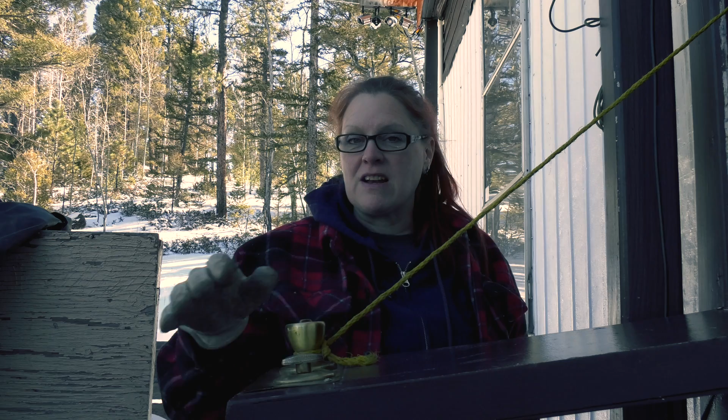First, let me explain our financial considerations in going the DIY route for building our house. Hi, Mimi. Because like it or not, almost every choice that we have made on this build so far has been financially motivated.

Because of supply chain issues and because lumber prices have fluctuated so wildly on this journey, we decided 2 years ago that we needed to abandon our budget and just kind of figure it out as we go. Lumber prices at big box stores are better than any lumber yard that I found in 2020. They will give you discounts if you buy in bulk. So saving up and buying all of your lumber at once for a portion of your build is highly recommended.

We also saved a lot on material costs so far by using a lot of reclaimed lumber from the build next door. If you can get your hands on some reclaimed material from other people's projects, do it. Yes, there's a lot of junk to sort through, but there is so much value in some of these piles left over from other people's jobs.

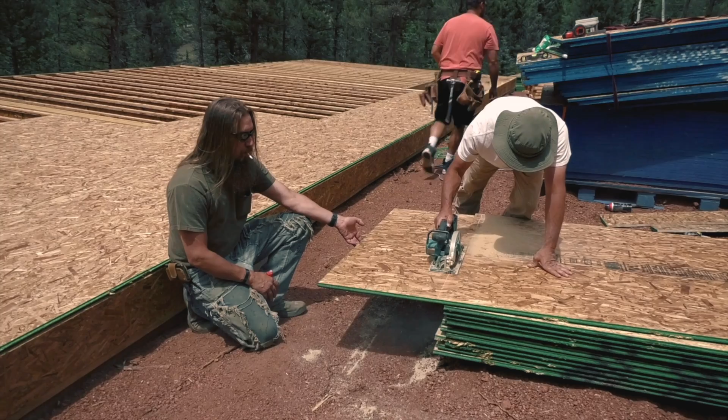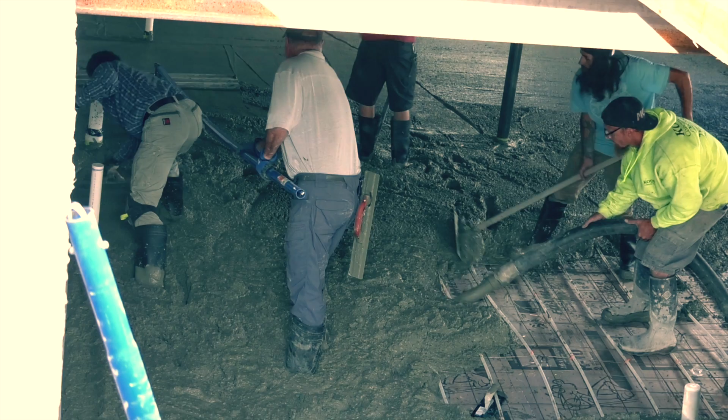Labor costs, in our experience, tend to be 2 to 3 times the cost of materials. And on top of the labor cost, there is a 10 to 25% general contractor fee added to the final bill that goes right to the general contractor. So for us, the savings on labor and the contractor alone were well worth the hassle to go the DIY route.

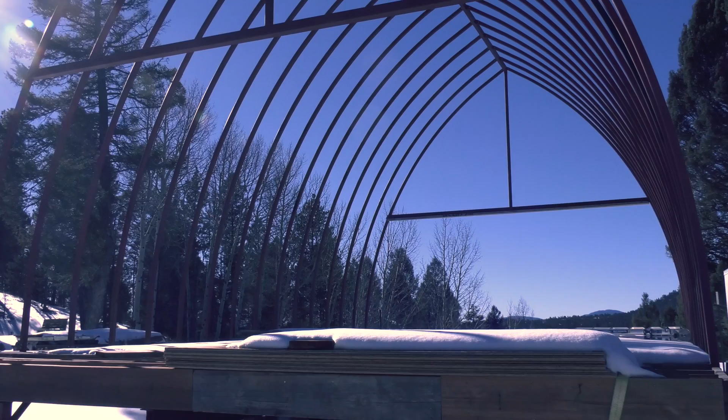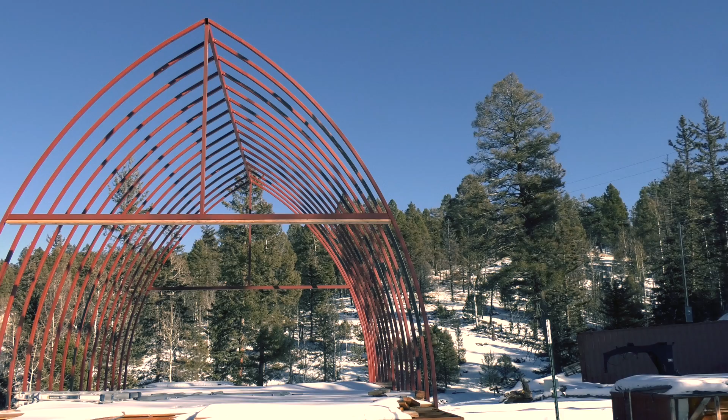Let's talk money, shall we? Starting first with the arched cabin house kit, we paid a total of $13,032.50 when we purchased the kit in 2017, and I'll break down those costs for you. We had one 20 by 32 arched cabin for $7,800. That includes the ridge beam, the side beams, attachment points, the ribs, the roofing material, and basic insulation.

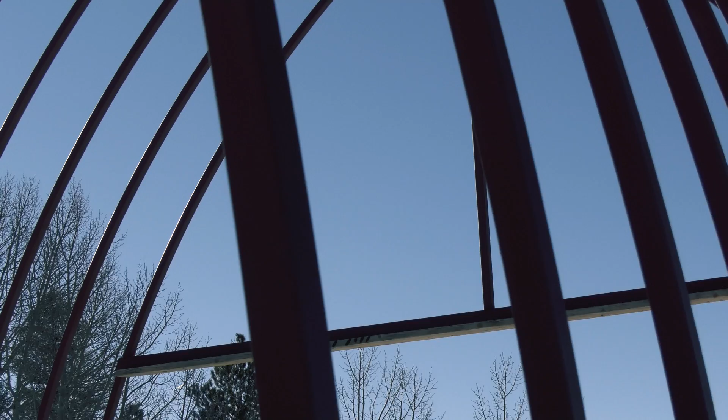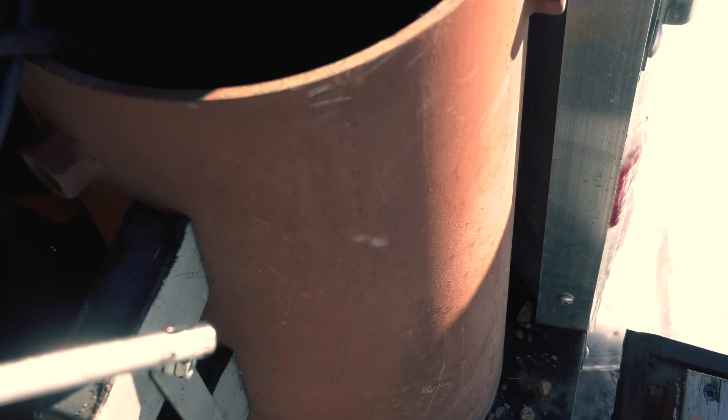We chose a color upgrade of fern green, which was $600, an insulation upgrade of $660, though I think if I were to do it again, I'd skip the upgrade and go right to spray foam. The fireplace thimble at $200, and then very basic engineered drawings at $500.

I'd do this probably differently as well, as I would have had them just do it on a basement in the original drawings and then give them our county requirements, or else I'd have the local architect just do the entire thing. But it is what it is now. Every county office is different on what they will require for you to pull a permit, so you'll want to go and talk to your local building department. Don't be intimidated because in our experience, they've been a great resource.

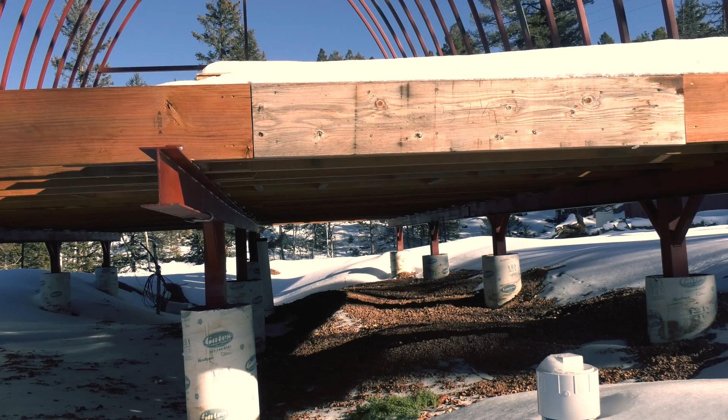The beams for the foundation were $760 for 3 beams that were about 38 feet each. And lastly, our delivery was $2.50 per mile. We paid $2,512.50 for delivery.

Guys, we're digging. Ah!

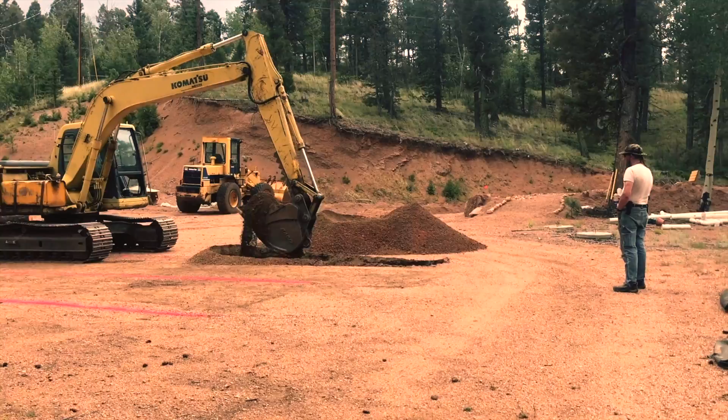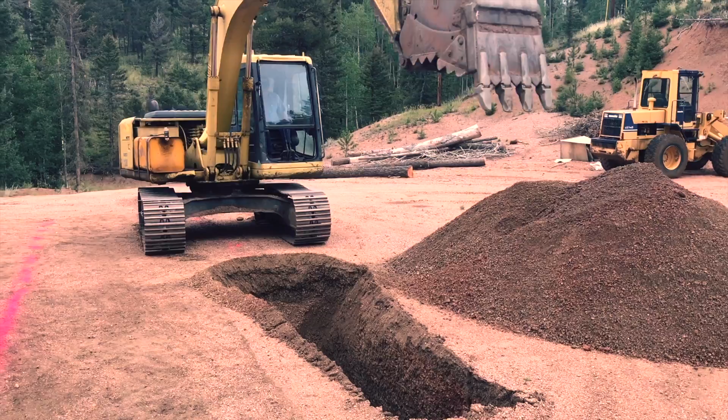And then it was on to our excavation. You could also save money here by renting equipment and doing it yourself. But we had decided to hire Bob the Builder for our excavation, and the total cost for our excavation, which included a driveway easement, some septic fixes from hitting the pipe in the driveway, and the 2 trenches, which actually turned into a pit after hitting some unyielding rock, that total was $14,062.70. Plus, an open hole inspection was required to make sure the soil was okay for the build.

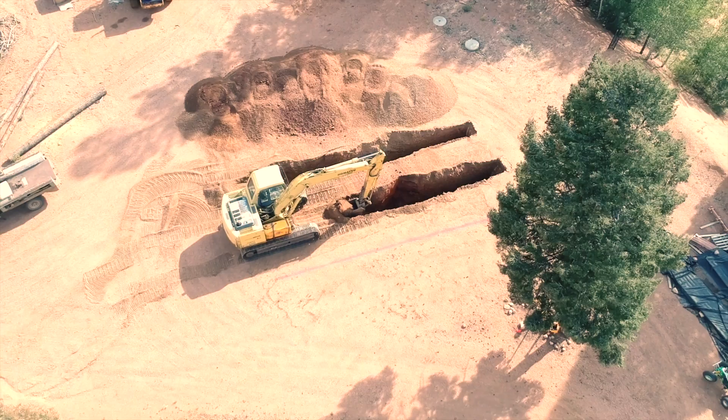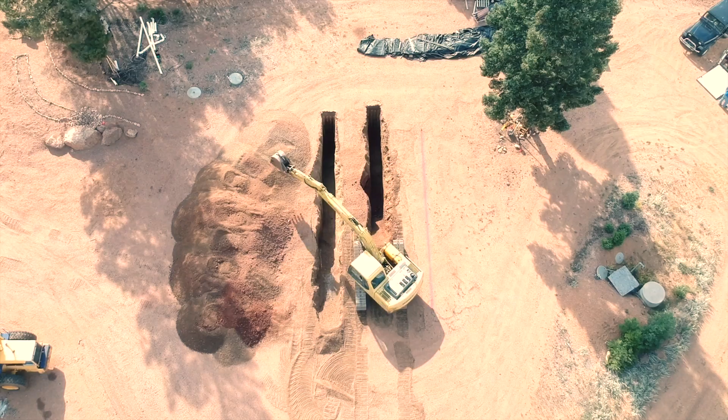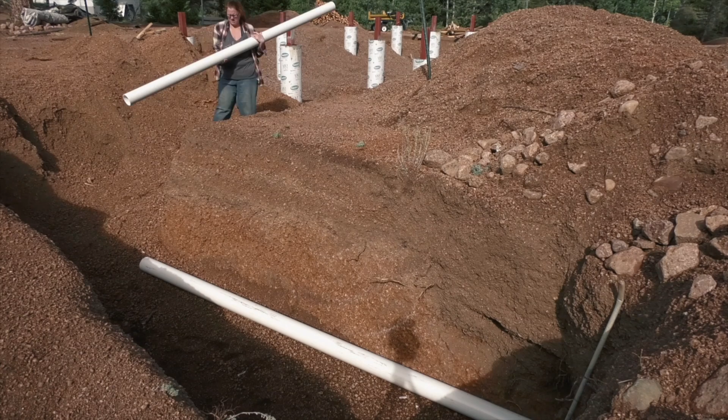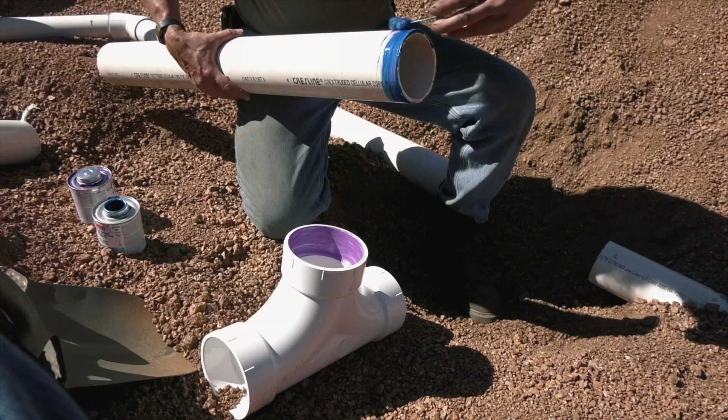Our power drop was $3,026 for design, transformer, pole, and 54 feet of power cable. We saved money on our utilities because our well and septic were already in place and just needed to be plumbed into position for where everything will come into the house. But we didn't have to drill a well or install a septic tank and field. That saved us probably a good $50,000.

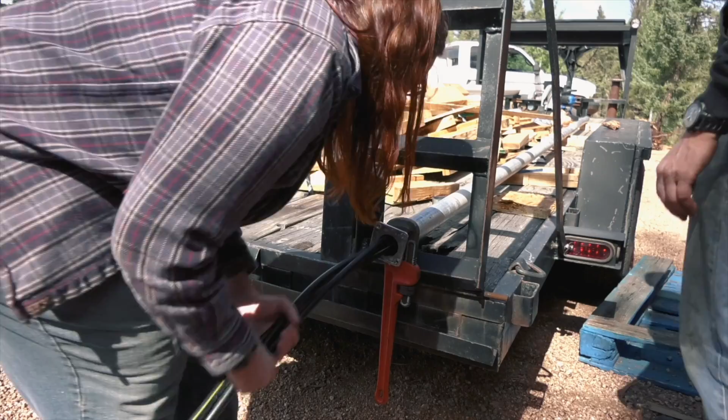We also didn't hire an electrician to install the meter box or to run the cable. Everything was inspected and approved by a local county inspector, and we saved thousands by taking on the task ourselves.

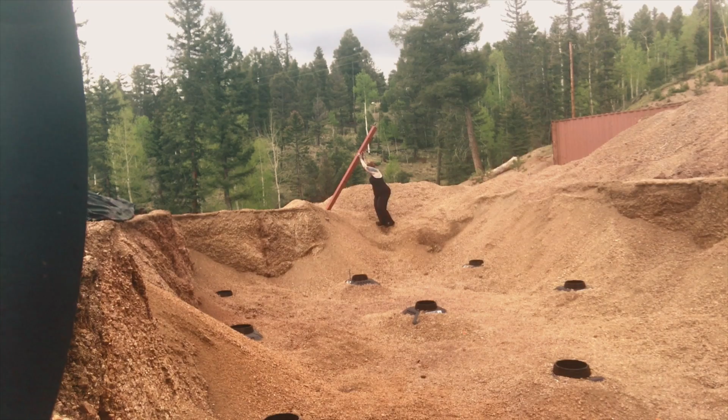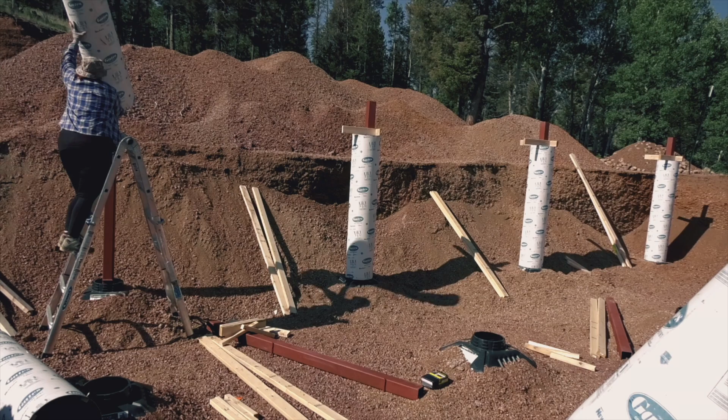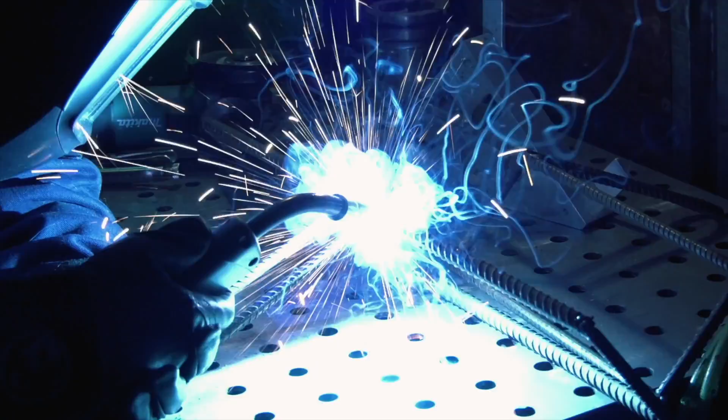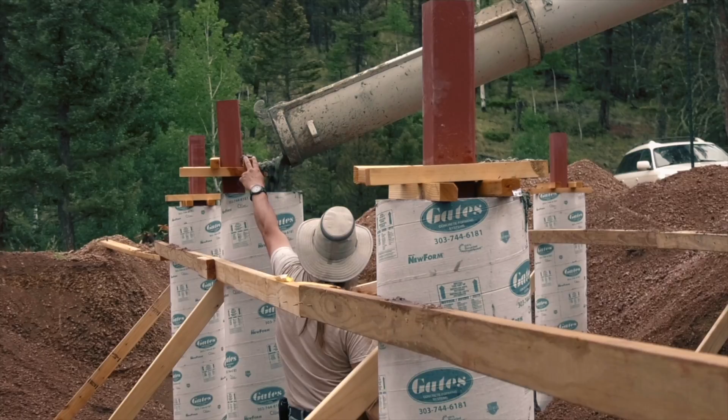With our utilities mostly figured out, it was time to move on to the actual house build. We purchased the materials needed for the post and pier foundation and ordered concrete from a local company to be delivered. Our total cost for the foundation came out to a little over $3,100 for materials and the concrete pour.

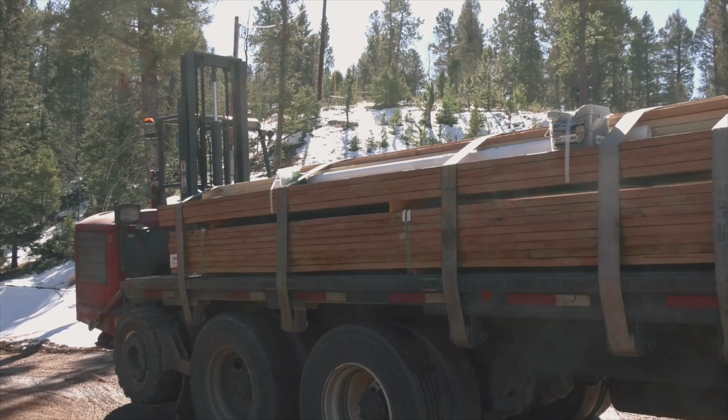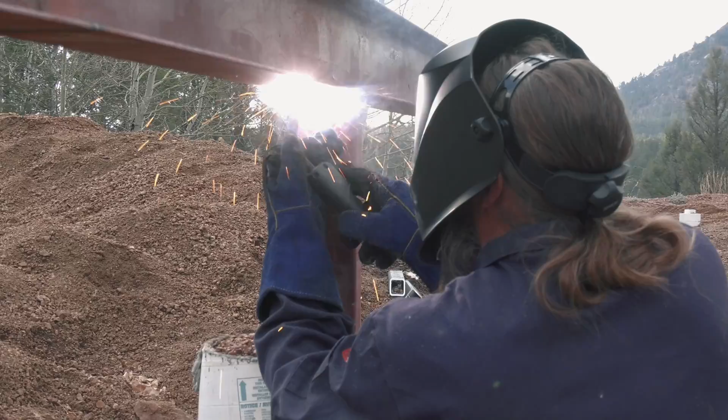For framing, we ordered all of our materials in October of 2020, at the beginning of all the supply chain issues and pricing increases. So we paid a little higher than average for many of our materials, but still a little less than a lot of the materials cost now.

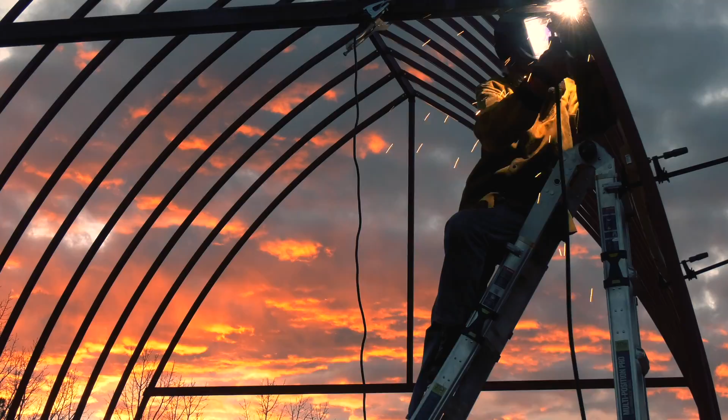Our total framing cost so far, which includes every step from welding the beams all the way up through standing the kit up and welding the supports on, and also including the cost of tools and materials we purchased, from metal and lumber to fasteners and sawhorses. That total is $3,886.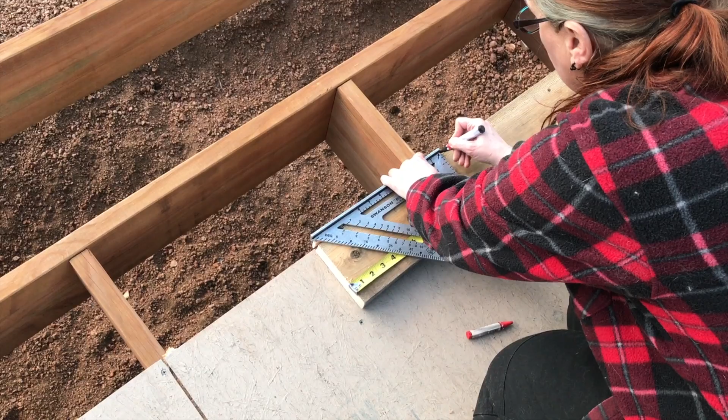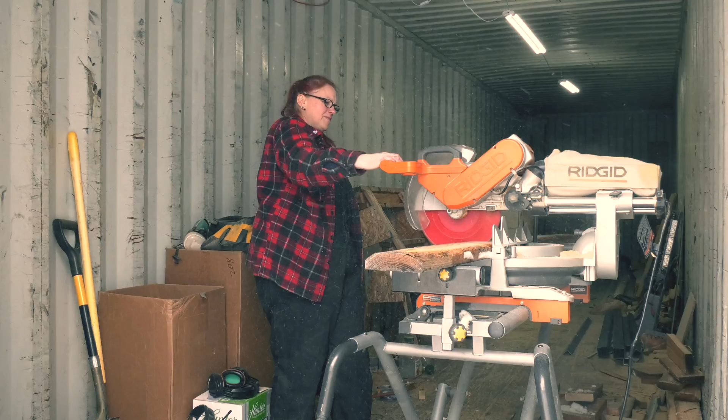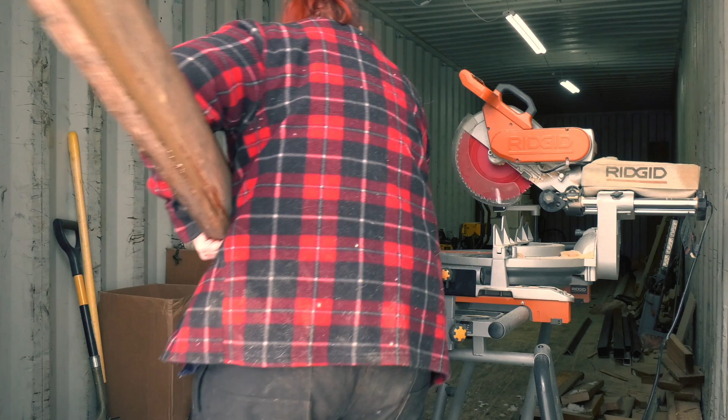Our total cost so far on the build for materials, labor, and administrative fees is $43,586.21. We have almost everything on hand to finish up most or all of the framing for the outside and inside of the arched cabin, and most of what we need to make everything dried in.

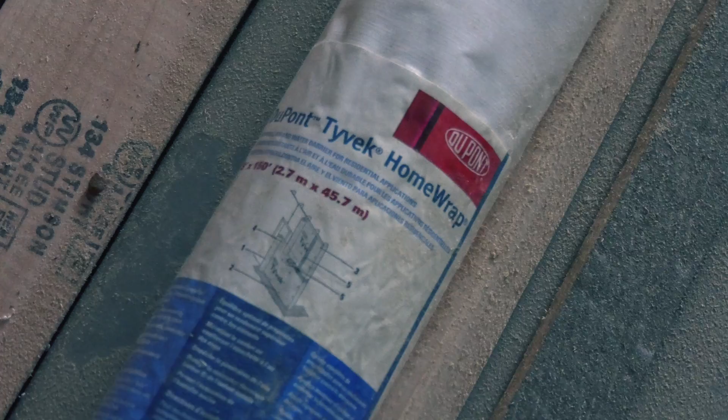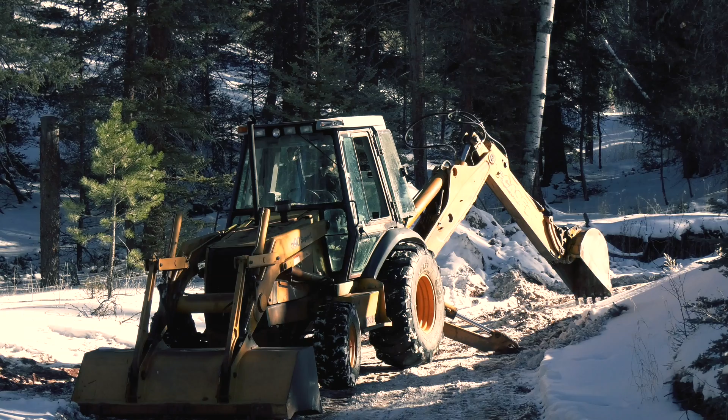We still have 3 huge purchases to figure out with doors, windows, and spray foam insulation. But I may see what availability is like for the Habitat for Humanity ReStore and other such places for the windows and doors. And I'll just start selling body parts for spray foam. But I think that's what we have to use to get a high enough R value to make the county and our propane bill happy.

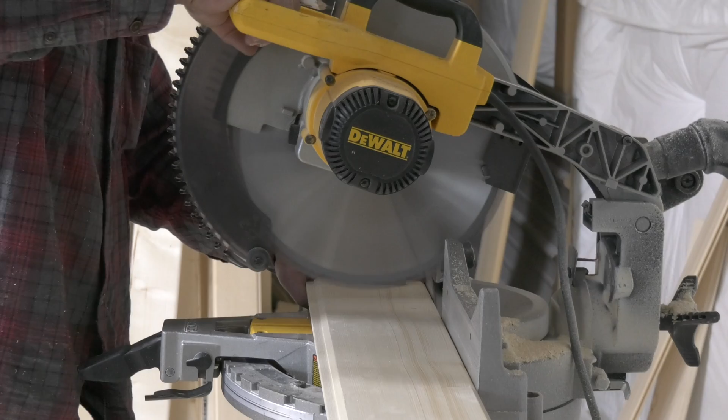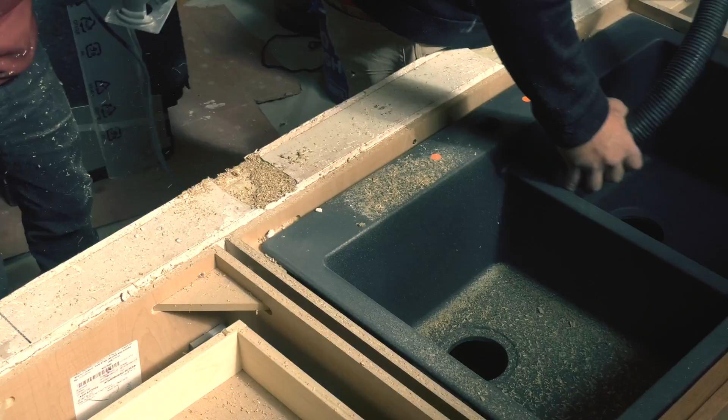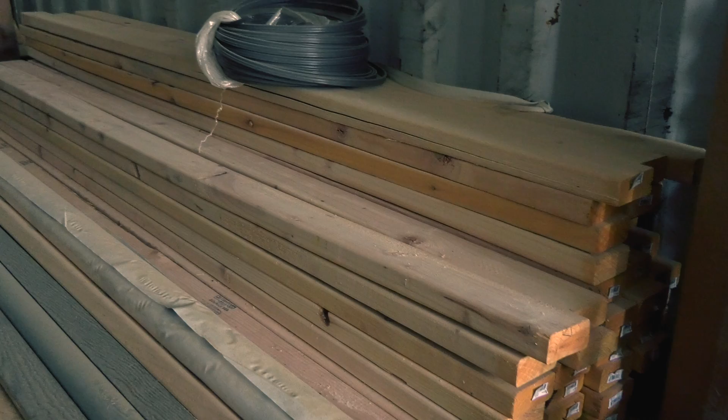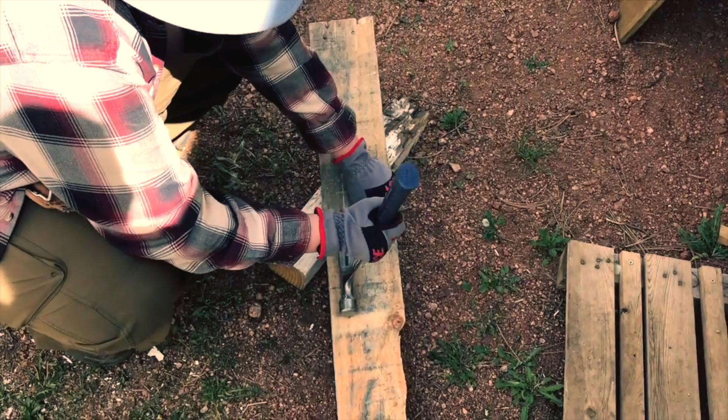Just imagine if you'd hired a crew and had to pay that 2 to 3 times the cost of your materials for labor, plus the additional 10 to 25% contractor fee, on top of what we've already paid for our materials and tools and stuff so far. You can learn to do this. I could barely handle the very few tools that I had when we started, and I still have a lot to learn, but the investment of my time is definitely worth the money that we have saved and will save on this build. I'll have these skills for as long as my brain will retain them.

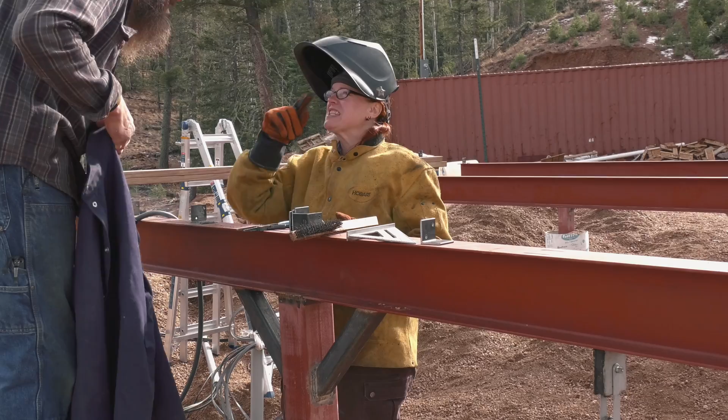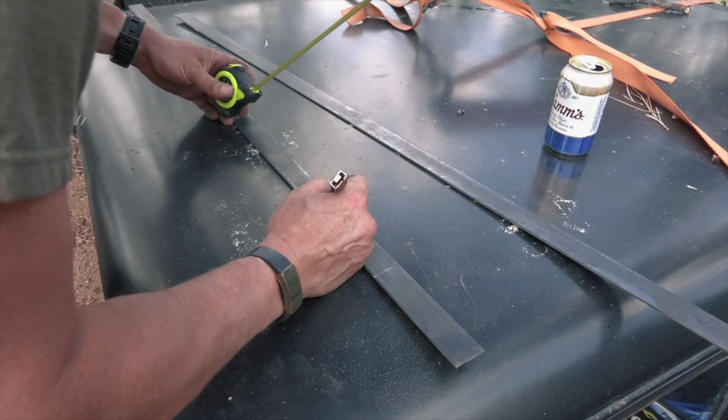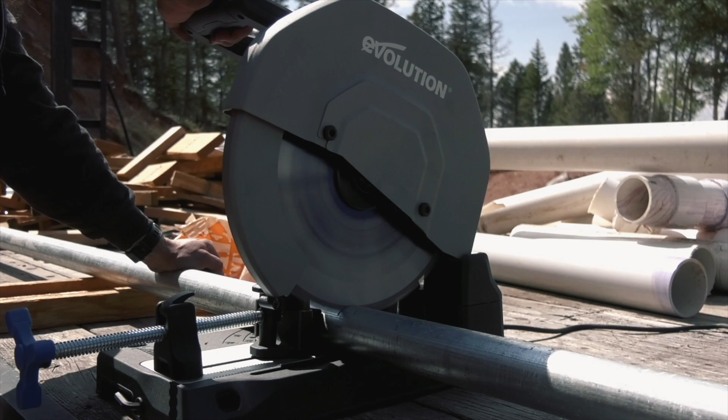And we've been able to do this in small amounts as our paychecks will allow, making this project way more attainable. The takeaway is this: we live paycheck to paycheck, and the ability to purchase items as we need them has really helped make this entire thing possible. Building a house is a lot like eating an elephant. You have to do it one bite at a time.

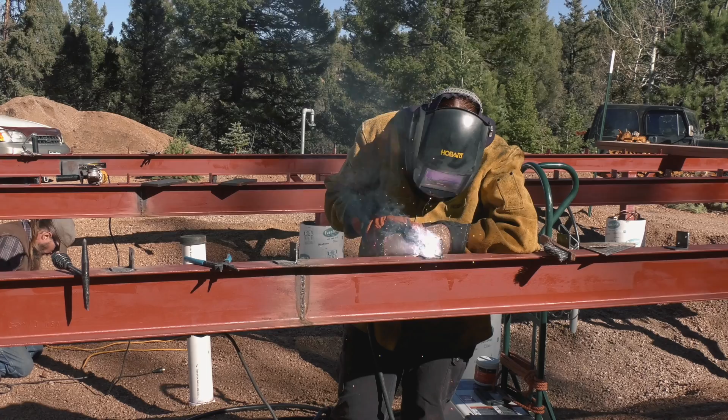While we have had some large upfront costs, much of this build was done by making purchases of $100 here and maybe $200 to $300 there. Sometimes we've had to save up for things, and sometimes we've had to borrow money or trade labor to obtain things. But when there's a will, there's a way, and it's absolutely attainable. We are here and doing this because we never gave up. You can do this too. I know that you can.